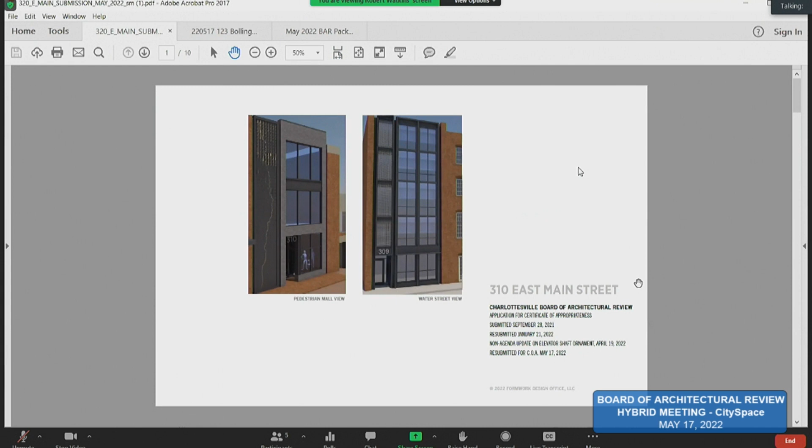Most of my comments align with the fact that tonight we have physical material samples in front of you. With respect to color, previously I'd been describing the coated metallic materials on the mall as black. The color we've settled on, and I probably said the phrase warm black, we'd been looking for warmth in the color, in the black.

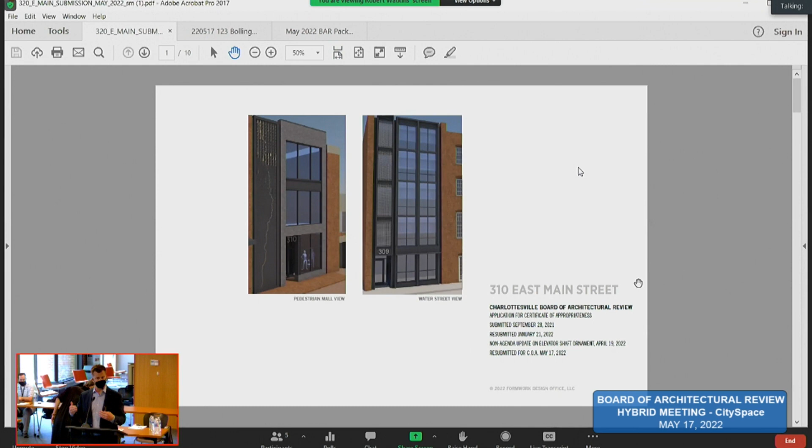We have a minuscule chip tonight, it's called a bronze or something of that sort. It's quite dark. It behaves really nicely in the shade, which is what we'll have on that side of the street. Shade and tree cover notwithstanding, there's a lot of light bouncing around there, and in many circumstances it reveals the contrast we're looking for with respect to the backing material, which is a very light anodized aluminum, but in a bronze shade.

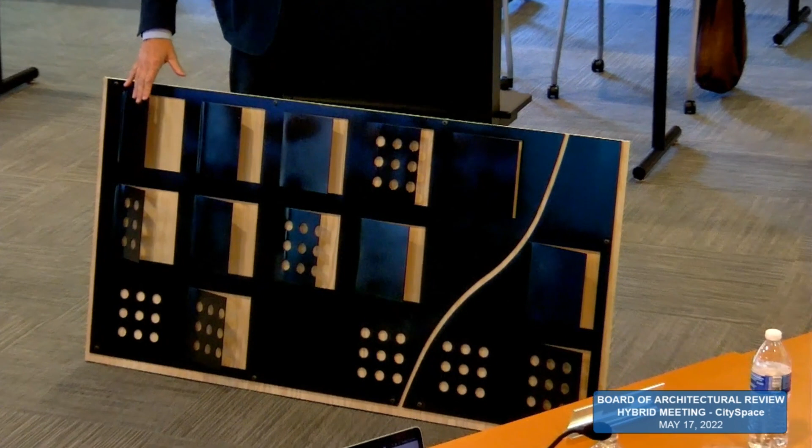The material color for this, the dark bronze, has a little bit of metallic flake, which gives it depth and helps it tolerate pollen and things like that without looking immediately lessened. We also have brick samples tonight in mortar, and I think the three together do a good job. The dark color, the light bronze backing, and the brick are well tuned with a little bit of warmth coming through, otherwise a fairly neutral palette.

Also in terms of material, Breck had made comments the first time we showed this about these projecting components and how that would be handled down close to grade, both in terms of encroaching into the right-of-way and also accidents or vandalism. His comments helped us get more complexity and think of layering in the system, where below 8 or 9 feet we don't have any of these projections. When these projections do occur higher up, they correlate with topographic information.

So as we get up into the Blue Ridge and go over the mountain, they adjust accordingly. This is a very crude, gross map where the Three Notch'd Road connects Richmond to Staunton. Towards the bottom, the lower 9 feet of the panel corresponds with tidewater conditions, we have no three-dimensional characteristics, and instead a graphic indication of just low, non-varying topography, shown as circular penetrations.

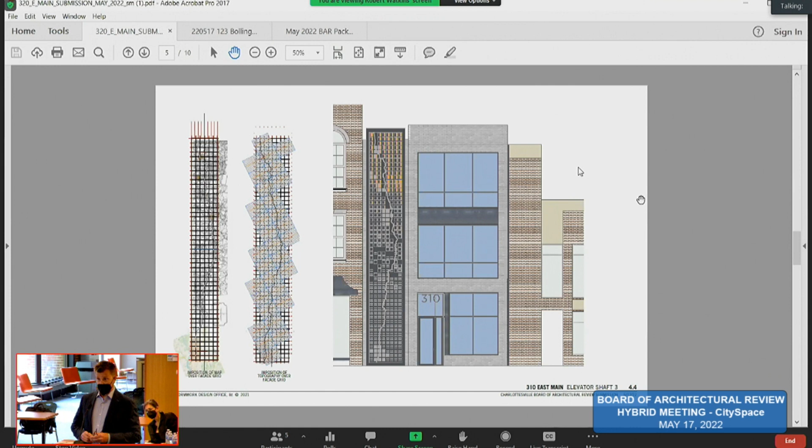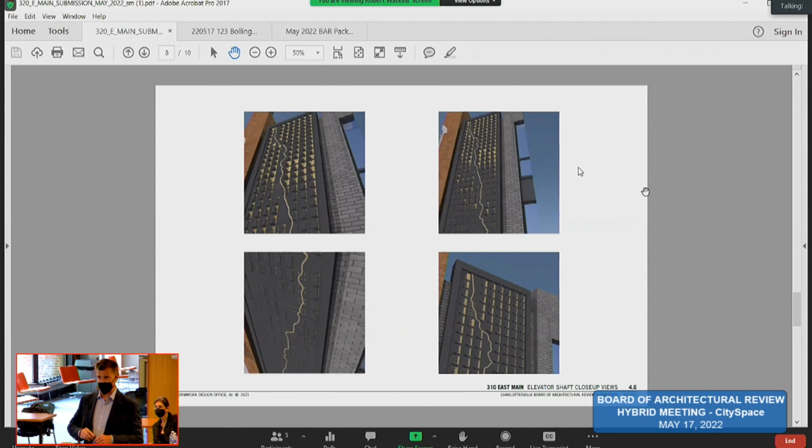I think I'm going to leave it at that, and we're here to answer questions. The views here, and in the next few pages, let you see with a little more clarity what specifically would be happening with these panels. Our previous illustrations were almost all full view, and it reduced detail down to a level that was very hard to register.

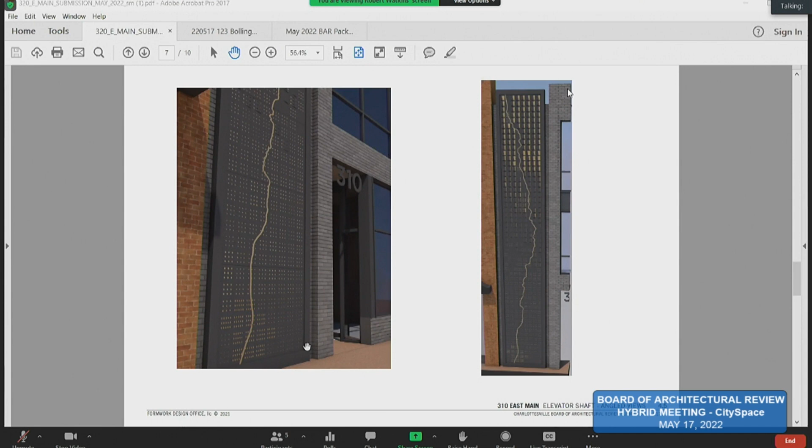Do you have an elevation of the first 5 to 10 feet? I think the one flat view we have in there should be - it's all vectors, so it should be zoomable.

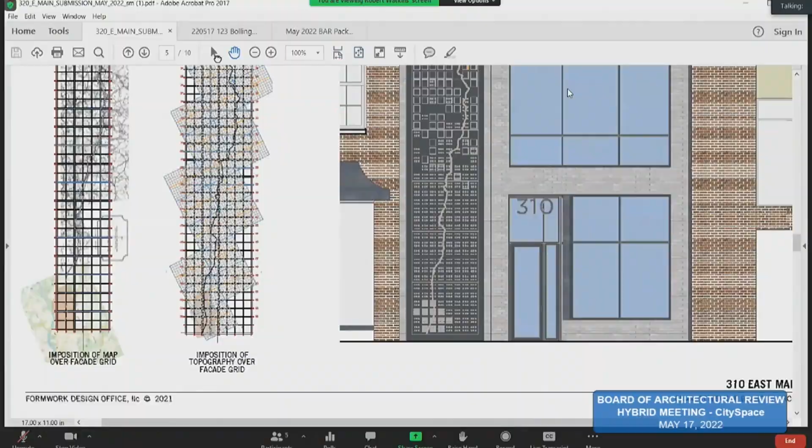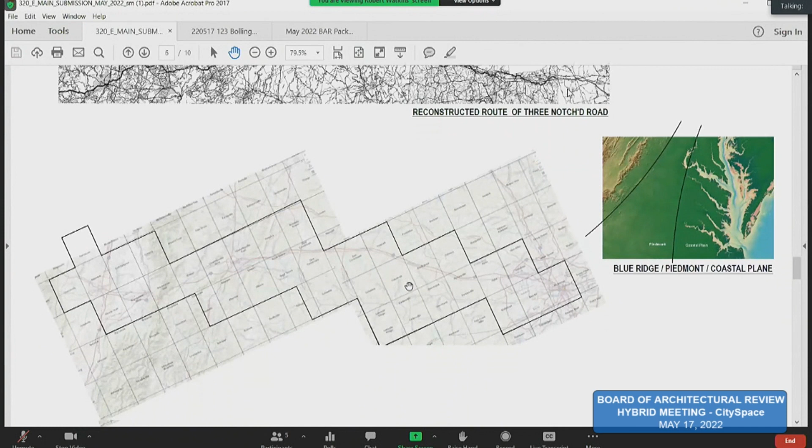What we're seeing there is - it's on 4.5 also. Yeah, and that actually shows a - this is one I sent. This is the one you sent today.

Yeah, actually, that shows an overlap that we've gotten away from, of both round circles and racetracks. It was not helping.

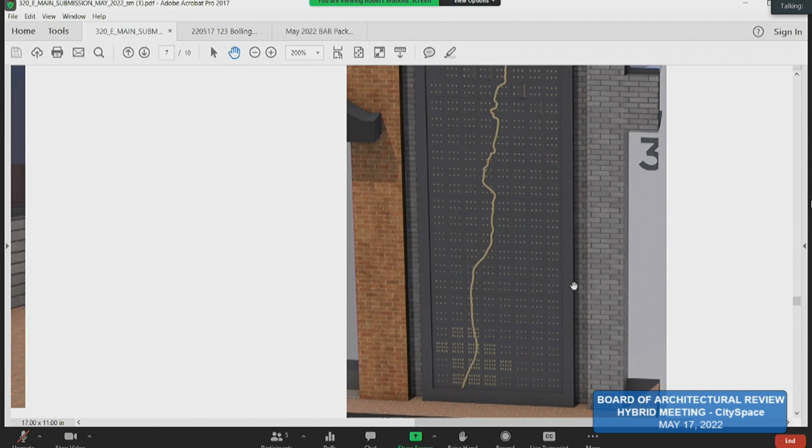Maybe on the - that's pretty zoomed. It wasn't helping in the sense that we didn't like the cutout when we saw the cutout in one of these mock-ups. One is current, but preferred the other view. The density is the same.

The projection blurs a little bit, but there's an oblong, definite oblong character with straight sides, so.

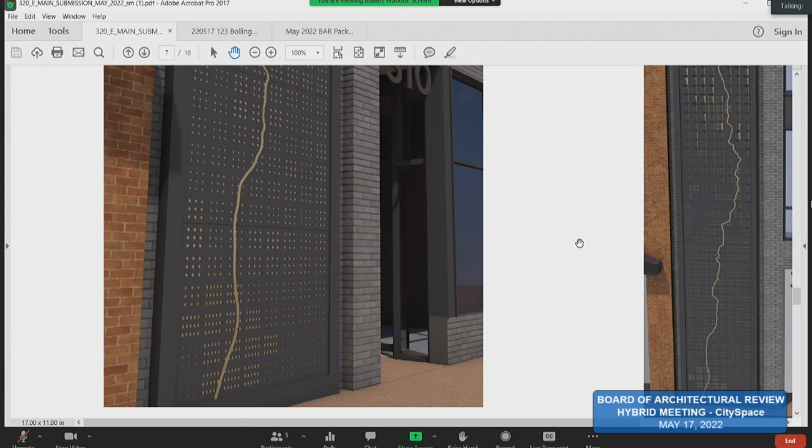Is there going to be a sign that explains to people what this is? I think we've been thinking about that, and I didn't want to bring it up because I didn't have it figured out. And here we are.

One of the things I'm trying to think about, without going down every rabbit hole, is what are our goals with the design of anything downtown, particularly something like this which is decorative and kind of a blank slate. To me, things like this succeed when they don't become mute quickly, so that there's some complexity and perhaps some ambiguity that lets you get more familiar over time. That said, why leave something unaddressed when it's there?

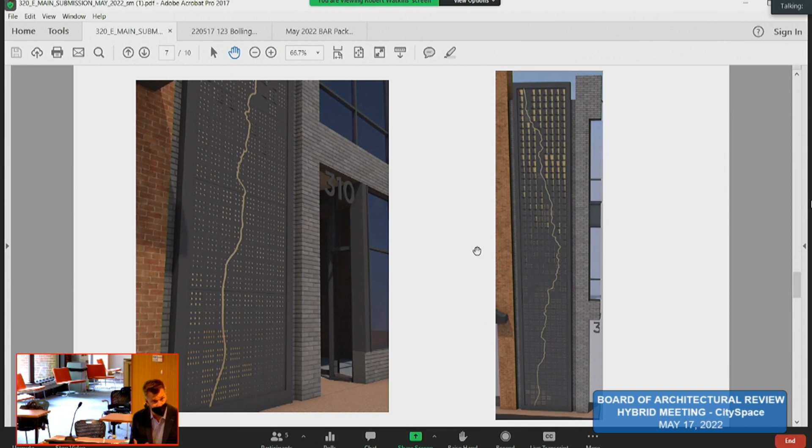By that I mean just the basics - there's probably 3 phrases that could mention this. There's a technique where we can very easily engrave, and we have a few panels where there's no penetration, but the various rules that determine where we get penetration are left as a few flat panels. I think I'd like to have a bit of information there, a little description that doesn't reveal itself as a historic plaque, but just a little explainer for those who want it.

I'm not suggesting that you have to. Oh yeah, I'm just curious if I'm gonna be the only one in the mall that knows what this is.

Well, I hope not. But I hope that wouldn't matter either. Any appreciation of it, or perhaps dislike of it, isn't dependent on someone else's understanding being as much as mine or yours. We live in a culture where common languages for decorative schemes have kind of been gone for quite a long time. And yet it's still a puzzle - it'd be nice to have some glue, some history or some kind of cultural resonance there. So I asked myself the same question.

I think I would like to get a minimum amount of description. I do agree that interpretation is incredibly important in this space, just to contextualize what this means, especially because you have projections here that some people may consider dangerous or that may look dangerous.

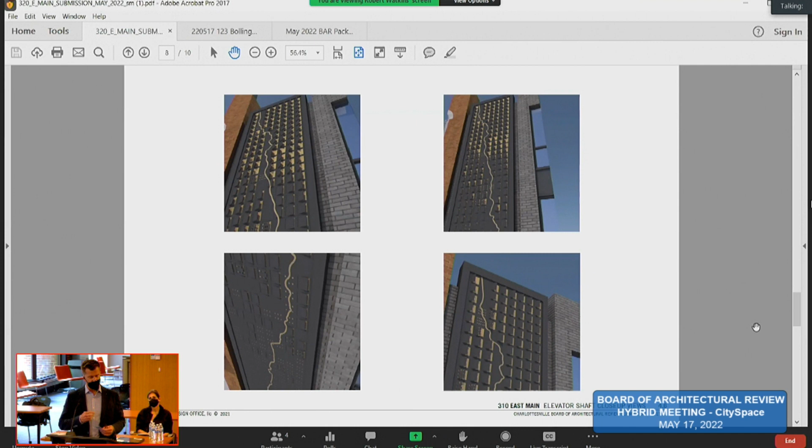I think I have two criteria that helped us get comfortable with this. First, we spent a fair amount of time down there with it. Second, I'm fine with some subtlety, but that's kind of subjective. But I think more so is both the repetition of the penetrations, the dots, but also the length of the pathway. It has that kind of Great Wall of China effect where the width of it is nothing substantial, but somehow the length of it, they say, I don't know if it's true, you can see it from space, but whether that's true or not, I know it is true that things that are long, your eye is happy to fill in the gaps where they are.

When I first saw this project, I thought that you were actually leaving a glass facade behind it. Actually, it became a kind of screen for the elevator because it exists as glass right now. Probably it's pretty far along in the process to make a decision like that at this point, but I can imagine that, like at night, for example, with a lit elevator shaft behind it, it would be quite spectacular.

That's my big concern too, is that it's never going to look as bright as it does in the renderings. Yeah, it's going to have shadows and something being behind this as well. I mean, that's my biggest skepticism.

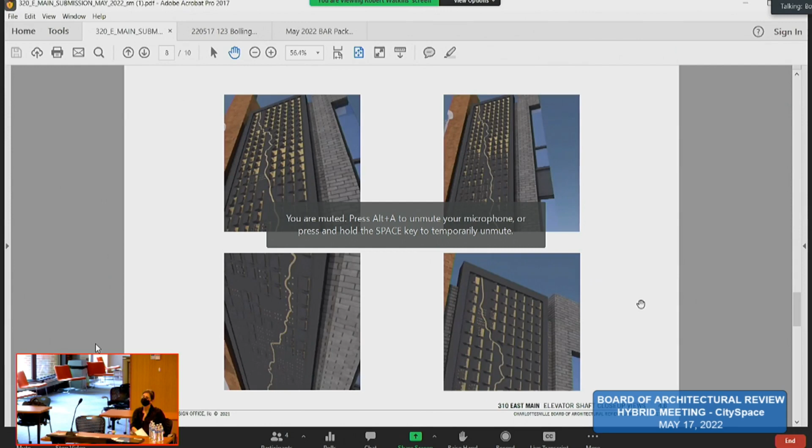As far as interpretation, I don't mind that we have to figure it out for ourselves. I think there are a lot of things about the mall that we don't know about, but we still can enjoy and appreciate, and we learn about by talking to people. For that part, I'm very comfortable with that part personally.

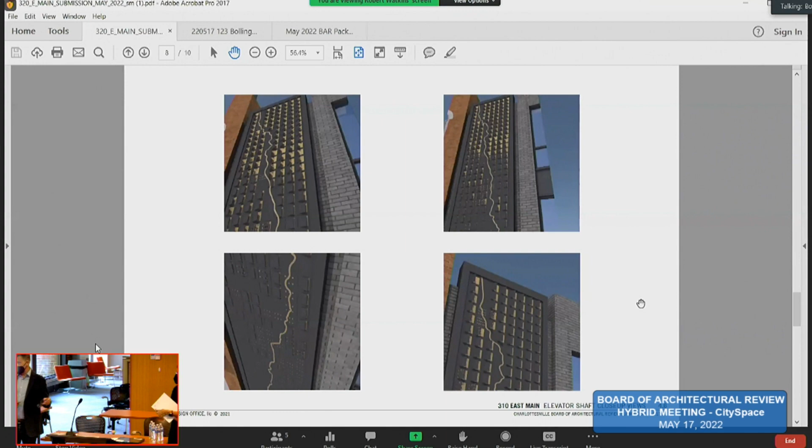Did you have something to say about it? Yeah, I just wanted to let you know that we did study that option, the layers of the backlighting, the maintenance involved, and the types of glass we would have to use. We ruled that out for this project.

I wanted to say something about the difference in the colors and the contrast, because I happen to really like the slightly less contrasting look versus what the 3D model shows. I think it's a little bit subtler in person, and that's nicer. The model always muddies the view in my estimation, versus seeing it in person. But to me, it's rather nice that there isn't a shocking contrast.

Could you pass around the metal samples, the back and... And I'll throw in a brick. So here's a solution, this is the mortar. I'm sorry, is this the mortar or the brick? That's the brick. Okay, thank you. Here's the mortar. Okay.

And I had a question about the mortar. Are you intending to have it raked back, or would it come up to the face? It would be to the face, but not... Mhm, yep. Yeah.

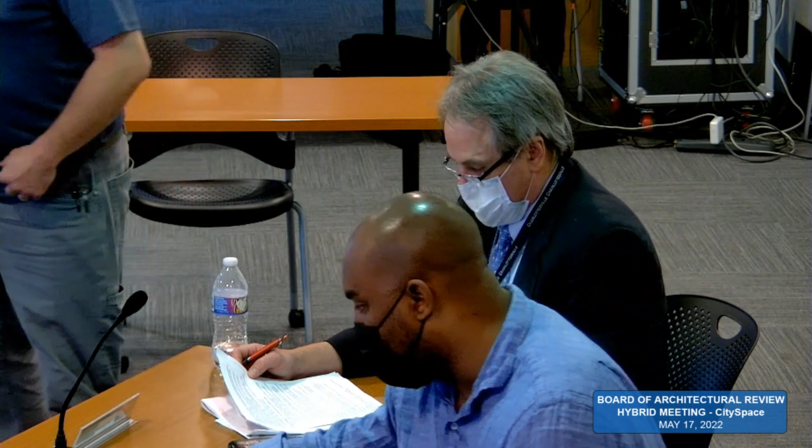We're not disturbing a historic structure in the sense of removing an element, and we're not trying to restore or rehabilitate. This is new, and we're viewing it as such. The guidelines also call for things like street level design providing visual interest to the passing pedestrian. I would say, whether you love or hate the design, it certainly checks that box.

So I think we've got the brick and the glazing, some of the more typical pieces we can look at, those are easy enough. But I just want to make sure we're staying within our guidelines and not getting into liking or disliking a sculpture.

That was the other thought I wanted to offer in comments, is that as a piece of sculpture, I usually think someone has a title, so maybe just what this was named would be helpful. And the only other piece, since you asked about birds, is will the birds nest in this?

And the last piece, I noticed some discussion about the glass earlier. I've included at the end of the staff report the report from that discussion a couple of years ago about the flexibility with the VLT, so if you needed anything to reference on that. But as I said, I just wanted to balance this with the design guidelines in this discussion. There's no yes/no list here, but those are some of the pieces that might be helpful moving forward. And with that, my apologies for interrupting.

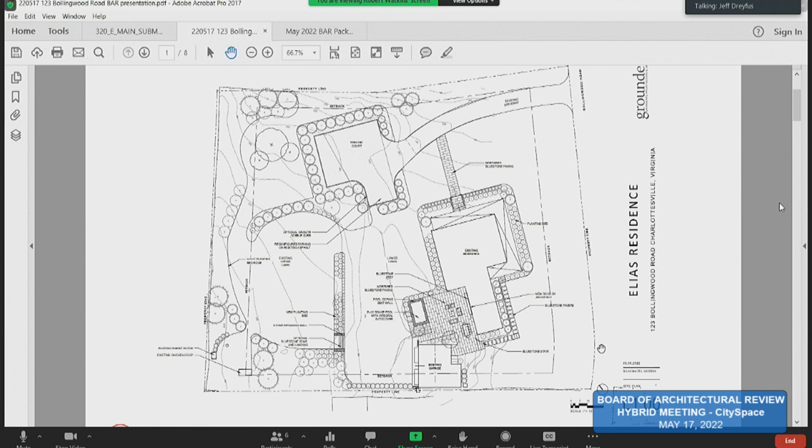But the real idea here is that there will be a small plunge pool and a large entertaining area just outside of this part of the house. Later in the presentation you can see this wing of the house is really the kitchen and family dining area. So I think we can probably move on from there.

You've seen these images before. This is the elevation we're talking about. It's interesting to see, in some of the photos on the next couple pages, the evolution of the house, the telescoping additions on the south end. In the top left you can even see a lean-to addition to the original farmhouse, which will be more exposed in some of the earlier photos. But here, outlined in red, is the location of the sliding door.

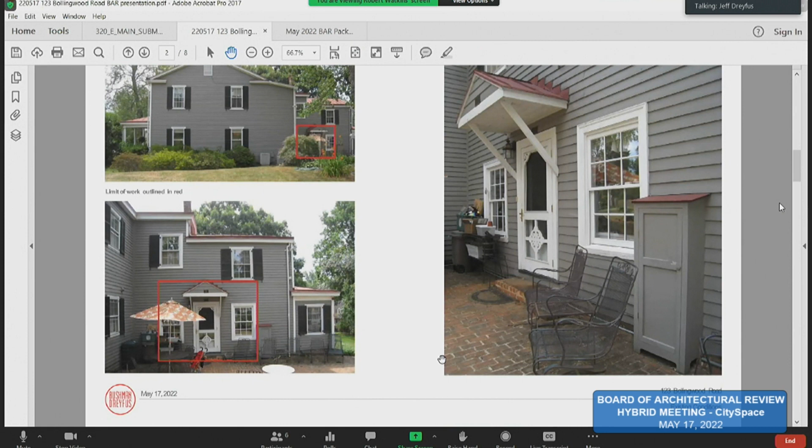On the right, we are really talking about taking out those two windows and the door, maintaining the existing head height, 6'8" on the interior, as is that current door. We will need to relocate, on the right of the far right window, that small enclosure which is the electric meter. So we are going to need to relocate that as part of this project. That hasn't been figured out yet, but it will need to be moved.

Some of the older photos of the house—top right is really the image we were talking about. On the original farmhouse, the lean-to is not yet in place in that photograph. So some of the first telescoping addition going out toward the right gets consumed by the lean-to that's later added. So we have a series of not-original structures here. We can keep going.

Here, simply the elevations, existing and proposed. The proposed sliding glass door—we are working to minimize the amount of structure on the element. The idea here is to be distinctly different from the historic fabric of the house.

In some of our earlier studies for the house 10 years ago, we were looking at enlarging some openings on the original farmhouse there on the left, where the main living room is, and the BAR was very opposed to modifying that facade. So our approach here, on the newer portions of the building, is to take a distinctly different approach—not pretend to be historic in any way, mimicking history or trying to make it fit in. So we're going distinctly modern with a 3-panel sliding glass door. The 2 panels on the left will stack with the panel on the right.

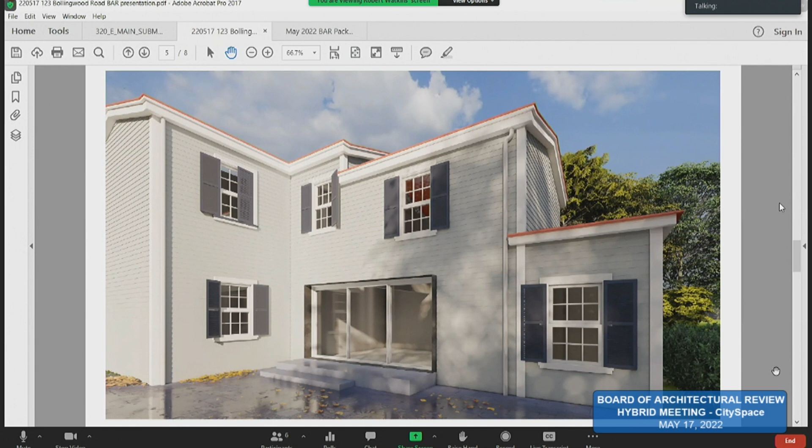The step down to the terrace is just at the two doors for a little bit of asymmetry, still a little bit more modern than if the step were to go the full width of the stoop. And because only those two panels on the left are operable, functionally, there's a reason for that step.

I think that might be... well, the next page is the head-on elevation. We will be repairing any and all of the siding to match the existing. The intervention will require underpinning some footings in the basement, but when we come back, we expect it will look simply like a surgical cut all the way around, and the siding will be repaired, with no alien patterning going on around the opening.

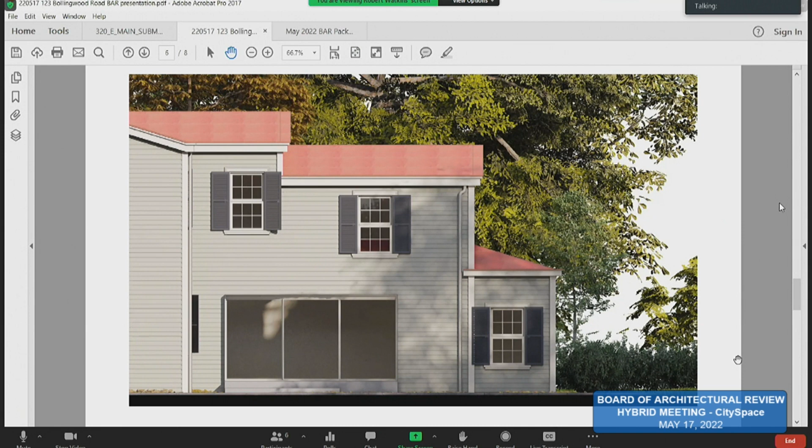And if we go further, a section through the sliding glass door with elements called out. And then you can also see we include here a plan on the far right, so you can see exactly how the interior lays out. This will actually straddle the kitchen and the family dining area. The dining table is usually right up against, next to the staircase that leads to the second floor.

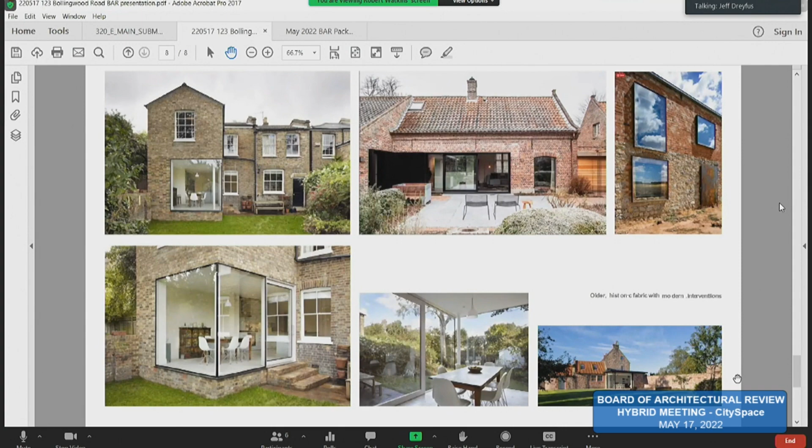And I think, let's see, beyond that, we include some of the precedent images that we showed the BAR in November. Again, the idea in all of these is that this is a very modern intervention in a historic structure, not trying to pretend to be anything other than that. And with that, I think I've said enough, but I'm happy to answer questions.

Jeff, you're back on the big screen, but I can refer back to the drawings whenever I need to.

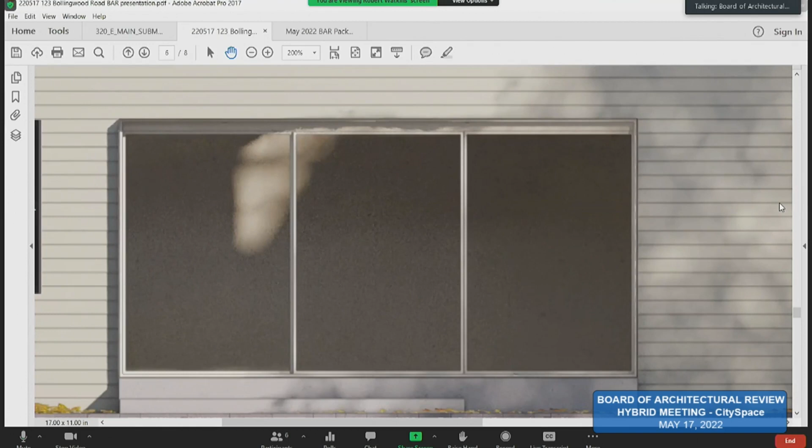Okay, so I think the shadows are probably confusing on that. If we go to the section - if we go to the building section, here we go. You can see the exterior wall comes down. The reason the sliding door unit itself is just proud of the existing wall, Sherry...

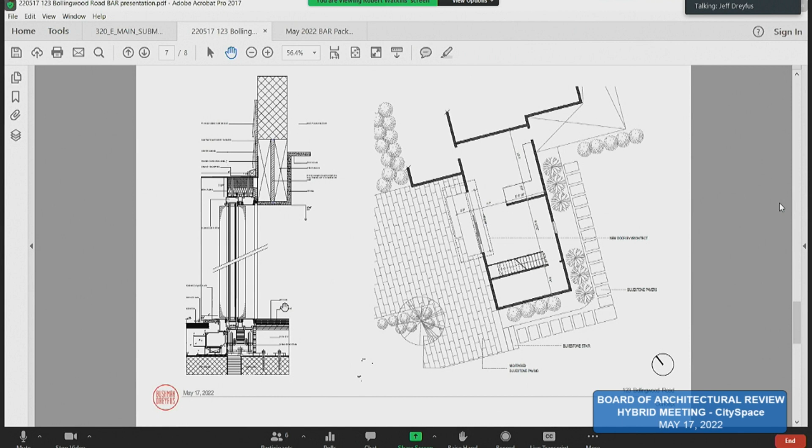Part of the reason for that is structural. We are going to need to pour a new foundation and footing underneath there. We've studied the existing basement foundations, and to put it in plane with the existing wall would potentially compromise the foundation. We've had a structural engineer look at it. So in this instance, the window is just proud of the plane of the existing wall.

And then beyond that, the metal surround - let me go to my own enlarged version of this. I just want to get the dimension right in terms of... sorry, here we go.

The surround itself is 8 inches proud of the wall, and the window unit is about 4 to 4.5 inches deep. So the metal surround is another 3.5 to 4 inches proud of the wall. Does that make sense? Yes, thank you.

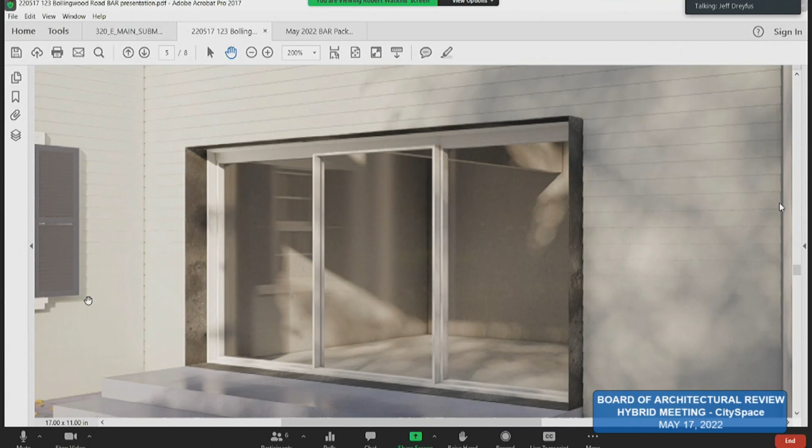And on both sides, I guess just on the concept, it looks like it's recessed on the left, but I understand that. Okay, good to know. And I know some of your examples showed that dynamic on the samples that you had shown previously and that you included tonight, so thank you.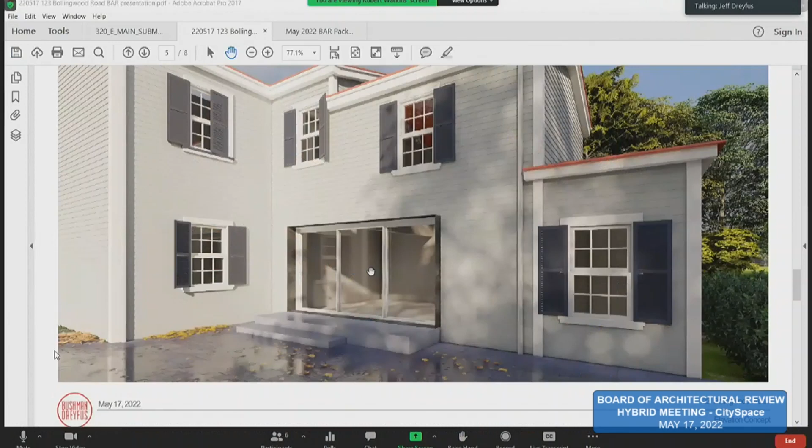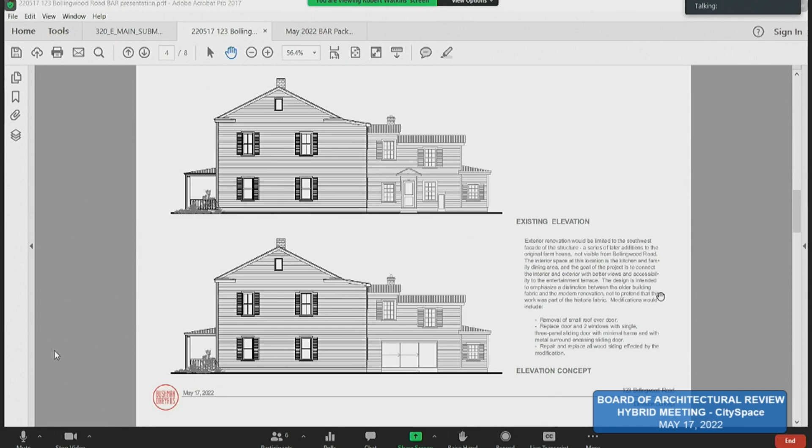Can I go back to a question for the applicant? Jeff, how old are the windows that we're demolishing in order to accomplish this? I'm confused about what part of the house. I'm not sure any of us are clear when these additions came. Robert and Jeff, I know you did some research initially, but I had done some as well, and I don't think any of us were able to discern when these additions came.

Jeff, do you know? It seemed like from the census data, there was a house built, and then Mr. Disney, I think he was associated with the university, a professor, and I think I have that—yeah, he built it, and Disney had 9 kids, so I think it was sort of, but I can't recall.

Your staff report says you believe the rear addition, excluding the addition to the southwest corner, likely dates between 1894 and prior to 1907. Is that right? Yeah, and that's just from the photos, aerial photos, and the Sanborns—nothing's clear, but yeah, I would say that's when.

And I would say this is the one historic photo that we have. I imagine it was taken in the 70s that shows the elevation in question. I think it's possible that these 2 windows on the first level are the 2 windows in question, and a door has been inserted since then, but these might be different. It's hard to tell because there has been this lean-to addition that's kind of subsumed this space in the back. Certainly the one on the right looks like it's in the same position because it's directly under the one on the second story.

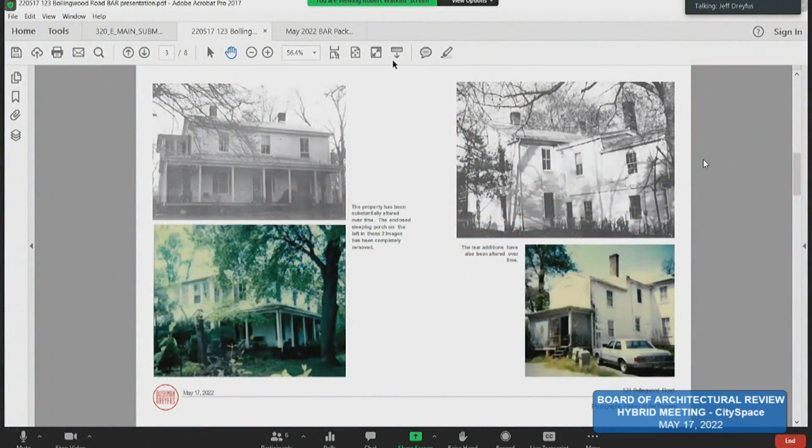Thank you. Yeah, it looks like when they moved window A, they also moved window B. They noticed in the photograph it looked like they were lined up, and there's less of a distance, I think, between B and D, would be my guess. Yeah, because the lower window is still even closer to that line, that first addition, line number 4. Both of those windows to the left of the yellow line are further right than in that original, or earlier photograph.

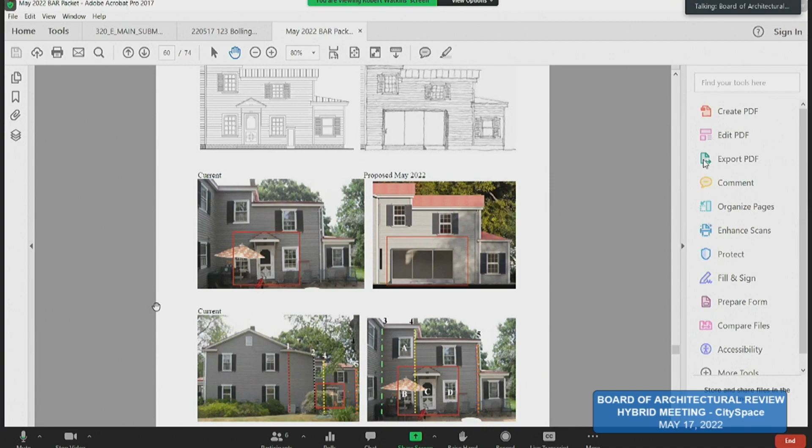For me, I felt comfortable that these windows would be removed. It did not seem that they were definitively original, and if they're double pane, they sound like a contemporary later addition, nor really critical to the building's overall design or detailing, and also not visible from the street. So I'm in support of this project, and feel like it's an elegant solution that distinguishes contemporary addition to the historic fabric.

I agree, I approve, or in support of it. You took the words right out of my mouth. I think it's a very elegant solution, the way it clearly contrasts with the historic fabric, but then there are some nice moves to relate to it with the windows and some of the materiality. I think it actually improves the composition of that elevation as well.

I think it'll be a nice addition. I think for that house, giving more light to the owners and whatever that space is behind it.

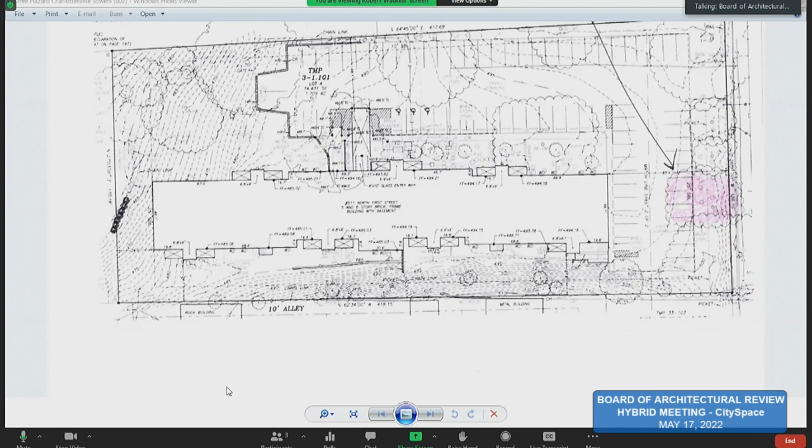And I was like, I don't know, I've always had a problem with hacking trees around lines, but it's more the question of whether to put a large shade tree in a situation where there's already a tree in its place. Trees, if something's removed, take up that space quickly, and will something in the understory even be worth planting?

How did I describe you... you're my most reasonable. We should go on a field trip.

Yeah, okay, there are photos. I mean, if we only planted understory trees under utilities.

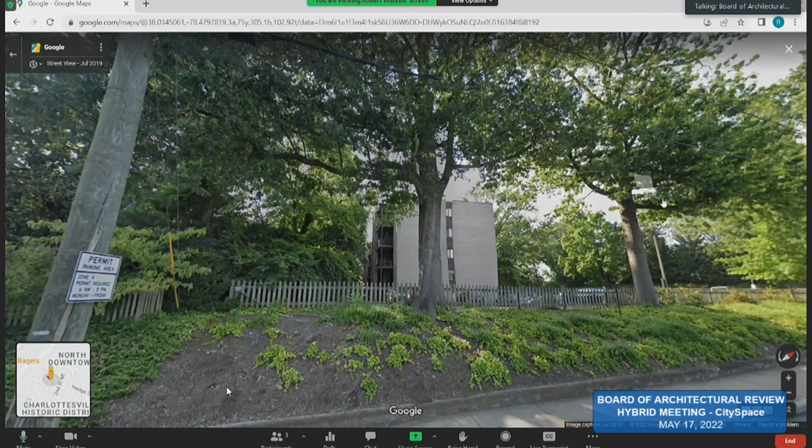On the left, have only... understory, sorry, the one on the right. The one on the left is fine, the one on the right is the one that - but that looks like it's not under the wire. Yeah, that looks like it's behind.

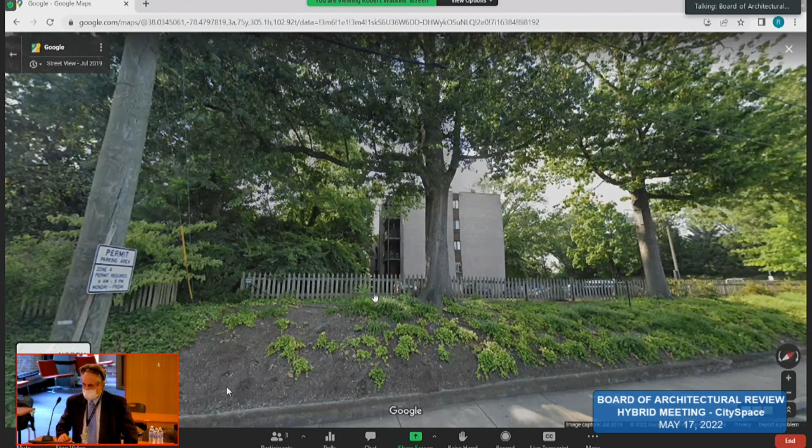Well, if you go down the end of the street and swing around - oh, you know what, I couldn't pull up the photos. He sent the attachment. Yeah, so go to Street View and spin around. Darn it, do you have that, did I send you that old photograph? That would be fun, the photos aren't opening.

The pin oak? That seems to me to be sufficiently behind the utilities. Yeah, you can see, you get a little bit of it there. You can see in Street View, when you go down the end of the street and turn back, you can see where they've kind of... this is an old photo from July 2019.

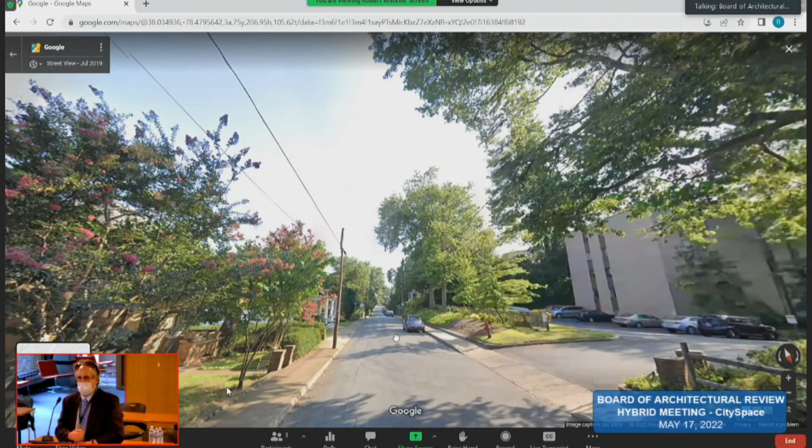Yeah, if you swing it back around, you can see where they've trimmed. I would go with the pin oak, definitely. Okay, and because if you swing it at the end, that's pretty behind. So there's two new ones that they put in, I can't recall when. Those are pin oak, and there's another one there, so I would say yes, put another one.

We've already got two more, put that in. Yeah, but fair enough, fair enough. In 20 years, everybody will thank you.

It's one of these things where our regulations say you must, even if it doesn't make any sense. So I kind of push things a little bit, saying, why am I putting a tree with a 60, 70-foot crown 10 feet away from a building and underneath a 20-foot power line? But...

In 20 years, they'll bury the power line. I know, we do laugh sometimes, like, where will we even be in 20 years?

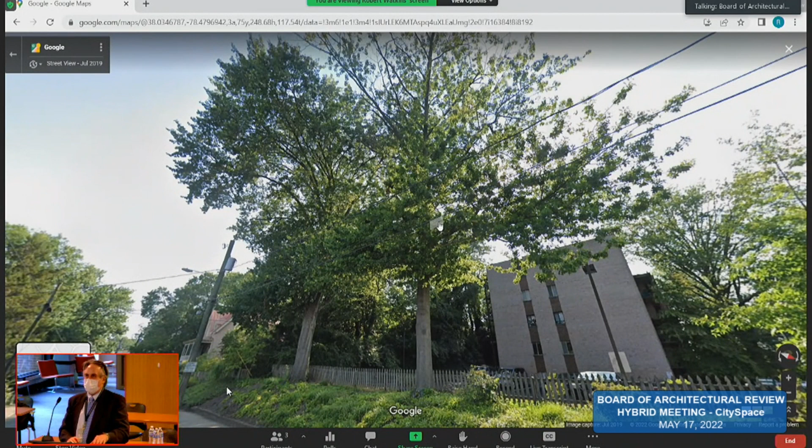All right, thank you, that's very helpful. I think that when there's a life safety issue and someone's asking me, and an arborist is expressing concern, I'm not going to hesitate to remove something like that.

So the third thing I had, I know you all have received a lot of emails about a particular project. I want to address it, I passed it up the ladder two weeks ago because I don't know what to do, but I do want this to give us an opportunity to learn and share a little bit. So it was a project we reviewed in April.

It was in a conservation district, which is intentionally a lighter touch. We're not getting into, an example I used is, even in an ADC district, if someone does a flagstone patio, we don't ask to see what's the pattern and sizes of the flagstone. So there are certain details we just don't get into the weeds on.

This in the drawing that was shown indicated that possibly there was a setback issue with a step. Normally those things, we don't do zoning review. You all are not a zoning body. Nothing that you decide grants a building permit. It doesn't waive life safety code. It doesn't waive city code. It doesn't change zoning.